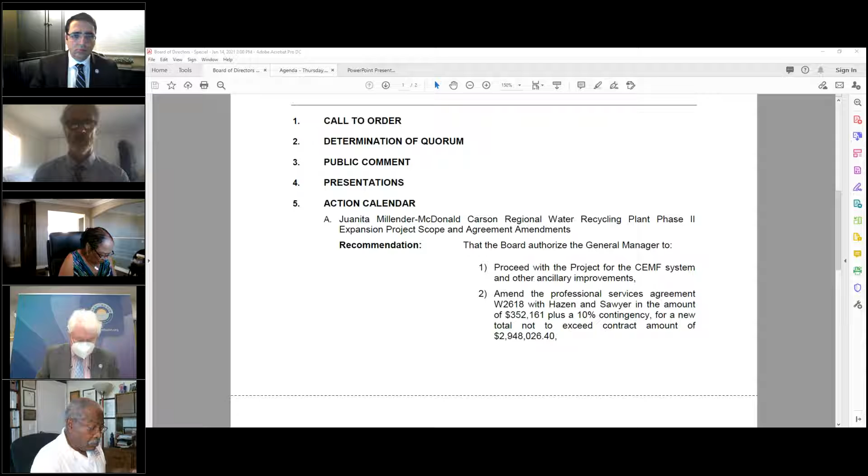All right, thank you. Okay, good afternoon, President Gray, members of the board, council, staff, members of the public. We, first of all, thank you for participating in the special board meeting, which was called together to deal with one item on the entire agenda on the action calendar, and it pertains to a long time project that we've been pursuing to increase water supply and upgrade generally the recycled water supply to the Marathon refinery down in Carson, fed from our regional plant down there, the Juanita Millender McDonald Carson Regional Water Quality Recycling Plant. No water quality, but that's what this is about.

So in a nutshell, there's an accompanying PowerPoint, which would be good if you can bring it up. It was emailed to you, or it will be on the screen in front of you. Essentially, this project has two main components, a TMVR and a CEMF, which will be explained shortly. But the bottom line is that one component was largely financed through Marathon, and one is through West Basin with the assistance of grant and low interest loans. The refinery at this point cannot proceed with their portion, but we can proceed with ours. But in order for West Basin to avail itself of the excellent grant and financing for this particular project, we need to have some redesign, put out a new bid packet, get the bids back, and meet a State Water Resources Control Board deadline - they're providing part of the funding - of June 1st, 2021.

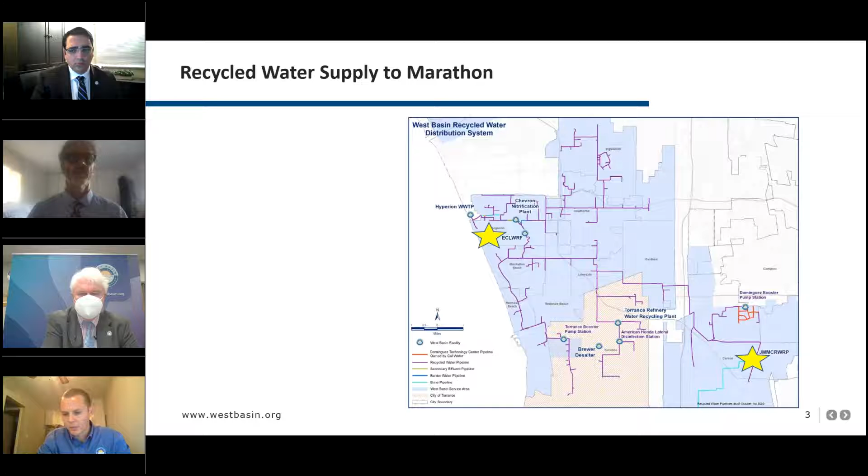Here you can see a map of our recycled water distribution system. On the left-hand side, you'll see where the Edward C. Little facility is located. You can also see the network of our distribution system. As Patrick mentioned earlier, there's over 100 miles that make up our distribution system now, which can easily be seen through the thin purple lines in the map. The Juanita Millender facility is located in the bottom right-hand corner, identified by the second star there. Our supply to the Carson refinery began with an original agreement with the Arco Products Company in 1997.

Construction of the facility started shortly after, and our first recycled water delivery to the refinery occurred in February of 2000. To date, we've supplied them over 28 billion gallons of water, which is a huge achievement.

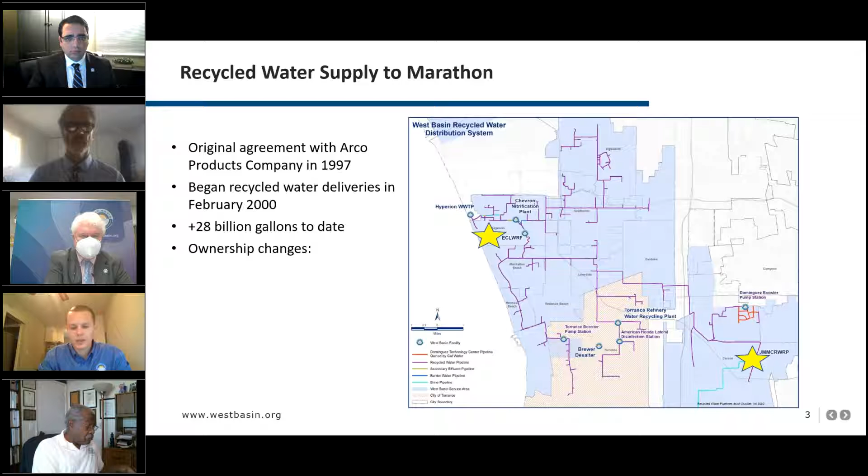Just to make sure everyone's familiar with the ownership changes, I'd like to give a brief overview. There's been quite a few name changes over the years. Arco was the owner in 1997. In 1999, they were bought by BP, another refinery company. Then in 2013, the refinery was acquired from BP by Tesoro. Tesoro underwent a name change in 2017, operating under the name Andeavor. And then finally in 2018, the current owner, Marathon Petroleum Company, took over.

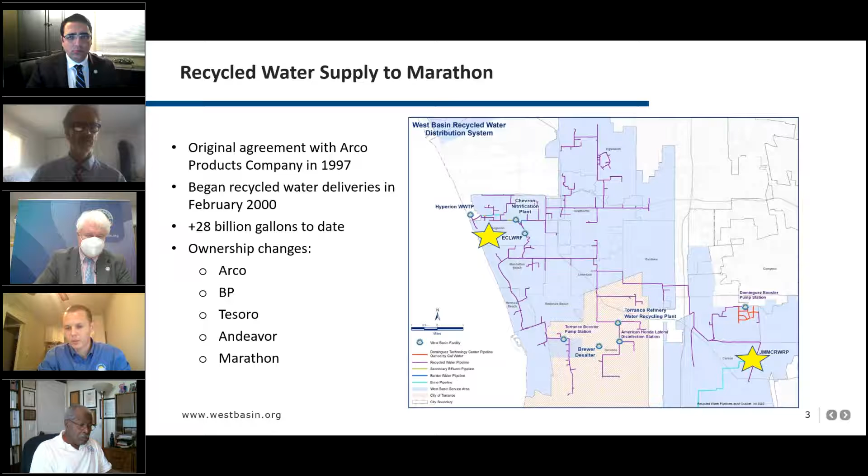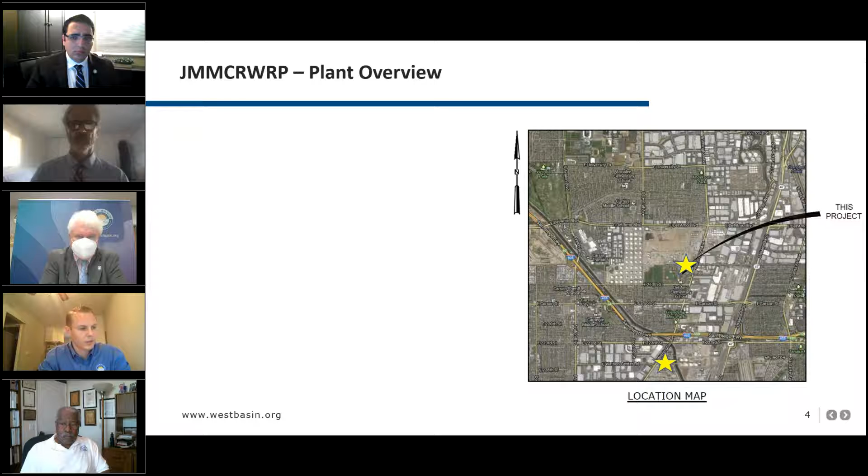High-level overview of the plant. Here's another map. The plant itself is located in the city of Carson, between Del Amo Boulevard and Carson Street along Wilmington Avenue. You can see the first star is where the project itself will take place at the plant. The second star is the location of our refinery, about a mile away south of the facility.

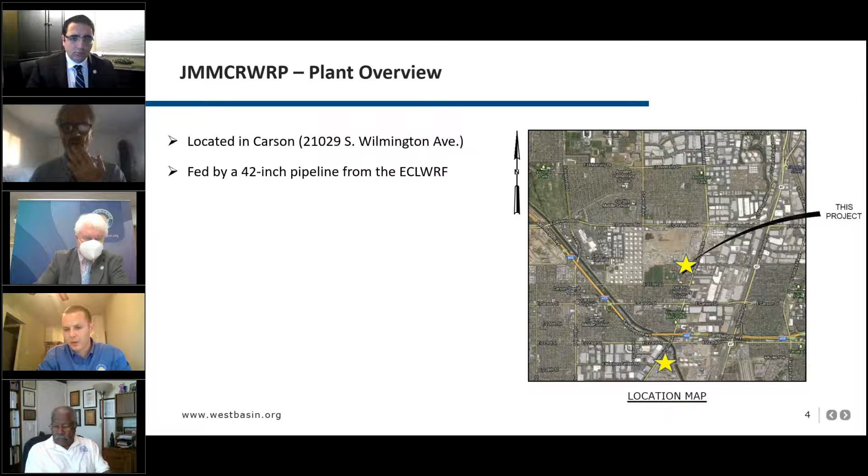The facility itself is fed by a 42-inch pipeline from the Edward C. Little facility, about 14 miles away from the Carson plant. The influent water is our Title 22 water quality, tertiary filtered and disinfected recycled water. The original construction back in 2000 included 2 treatment trains to provide 2 different qualities of water.

The first being a low pressure boiler feed water. That water is produced using microfiltration and reverse osmosis. The original treatment train built in 2000 was for a total of 5.18 million gallons per day.

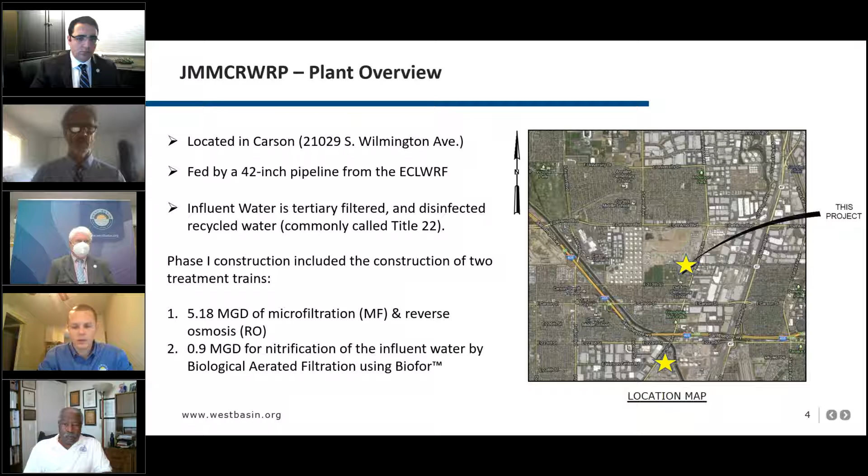The second water quality that comes out of the facility is a nitrified water quality for industrial cooling tower applications. This nitrification process is done by a biological aerated filtration, commonly called our Biofor units. This treatment train was originally built with the capacity of 0.9 mgd.

This will easily facilitate the construction of a new system while the old system remains online, and following construction we would then have the ability to go ahead and decommission the old facility.

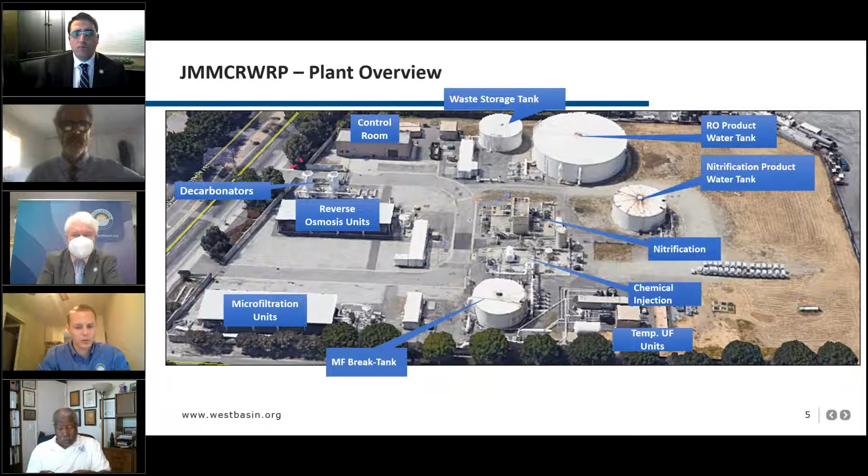Before I dive into the details of the subject project, I want to note that West Basin's had pretty extensive efforts exploring improvements of the Carson facility, going back all the way to 2008. For over a decade, we've been studying improvements not only to treatment technologies, but alternative treatment train orientations and configurations, as well as alternative means for optimizing both the MF and RO capacities. Ultimately, all of these efforts have led to the preferred design and construction of the subject Phase 2 expansion project.

We kicked off the Phase 2 expansion project with the design phase in November 2015. The main scope of work, as Patrick highlighted earlier, included the installation of a 2.0 million gallon per day tertiary membrane bioreactor, which would supplement that nitrified water quality and build upon the Biofor's current capacity. The financing for this side of the project was to be done through Marathon and supplemented by additional grants and loans.

Then the second main component was the installation of a brand new open platform, custom engineered microfiltration system with a firm capacity of 5.88 MGD, which would ultimately replace our aging microfiltration system out there now. This side of the project was to be paid for by West Basin and also supplemented by grants and low interest loans.

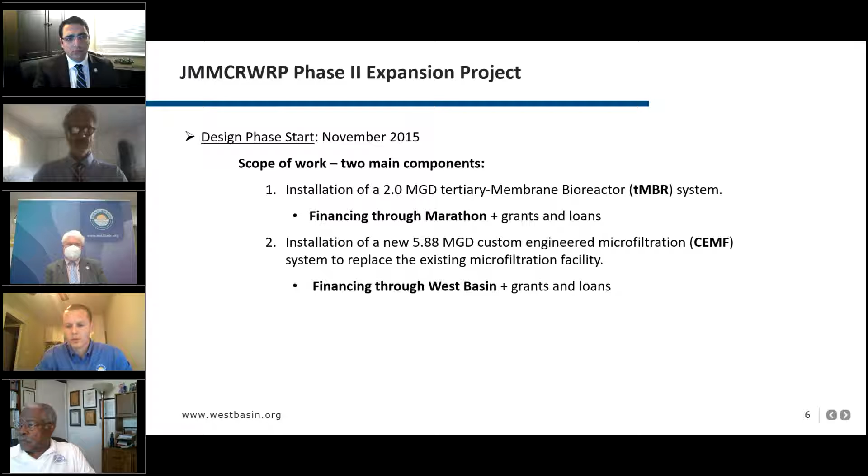Furthermore, we'll be building a new carbon dioxide storage and dosing system, which will help improve some scaling that occurs over time on our Biofor units. Additionally, there will be a small standby emergency generator to keep our RO product water pumps going in the event of a power outage.

It's been noted that recently we've been okay, but in the years leading up to this past year, power outages were quite frequent out at the facility.

Our engineering firm for this engagement is Hazen and Sawyer. They're a professional engineering firm located out of downtown LA. Their home office is out of downtown LA.

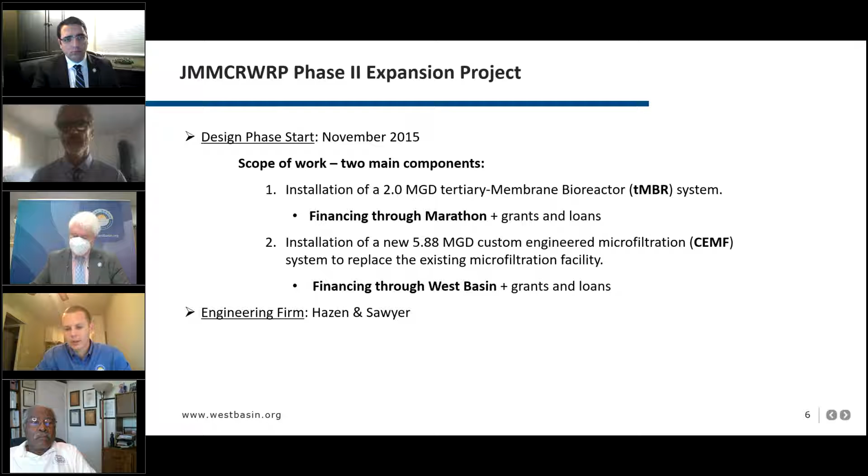One nuance to this project: in parallel to the design, the custom engineered system and the TMBR are highly technical, standalone systems. In parallel to the design, staff also engaged in two requests for proposals for procurement of these specialized equipments. Ultimately, WesTech was selected as the preferred vendor for the custom engineered microfiltration system, and a company called Zenon, a subsidiary of GE Water, was selected for the TMBR.

Ultimately, this approach to the project provides West Basin a handful of benefits. Upon awarding an eventual construction contractor, this allows West Basin to assign these procurement agreements to the contractor. This allows us to upfront establish contract pricing that will inform project financing and funding, and also allows us to pre-select the membrane vendor capable of providing the best overall system to West Basin.

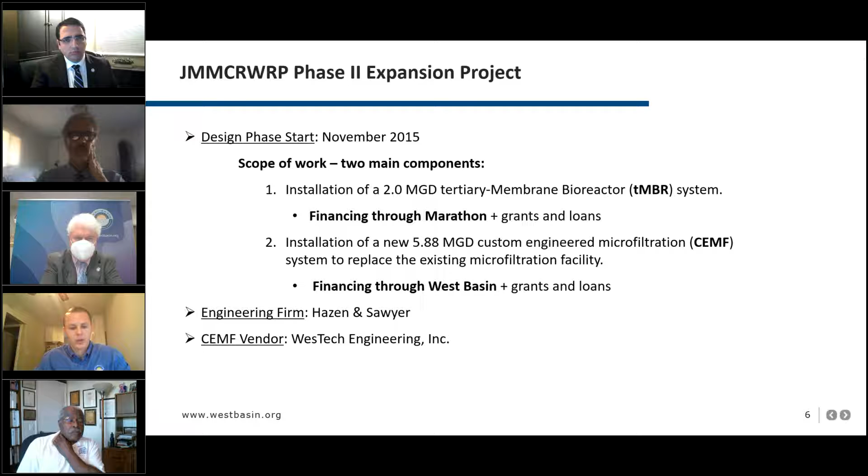This was a competitive and rigorous process that we went through. Thirdly, it provides a mechanism for the pre-selected membrane vendor to be assigned to the general contractor and become part of the general contractor's contract.

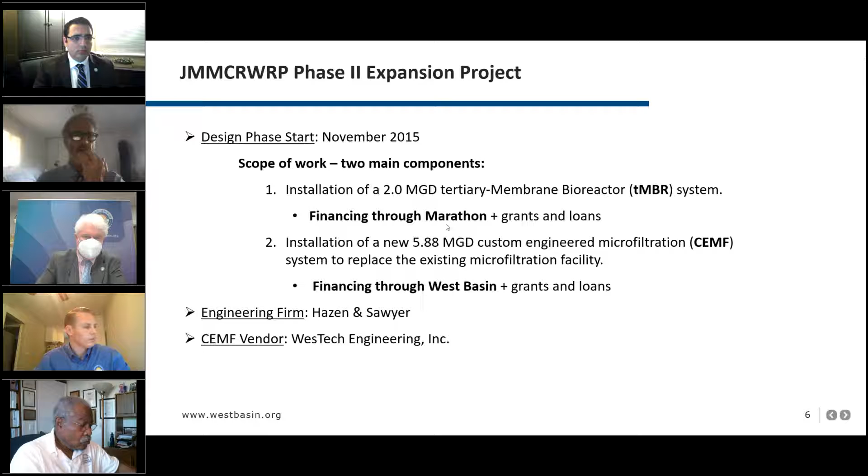Quick review of the timeline of events that have led us to this point today, which will inform our ultimate recommendation at the end of the presentation. Starting in advance of the design phase, before we even jumped into the legwork, West Basin staff submitted a request to the State Water Resource Control Board, Department of Financial Assistance, for funding for this project. We did that about 9 months before the design phase.

We kicked off the design in late 2015, continued through 2016, and ultimately received notice in 2017 from the Department of Financial Assistance that our funding was approved. We wrapped up the design in late 2017 and went out to bid in early 2018, receiving 3 construction bids at the time.

At the same time, staff was engaged in negotiations with Marathon for the funding of this project. Shortly after we received the bids, we were informed that Marathon had acquired the Carson refinery from the Tesoro company, and they let us know they would not be able to commit to the project within West Basin's 45-day required window per the public contracting code. At that time, in May of 2018, the board voted to reject all construction bids, as within their right.

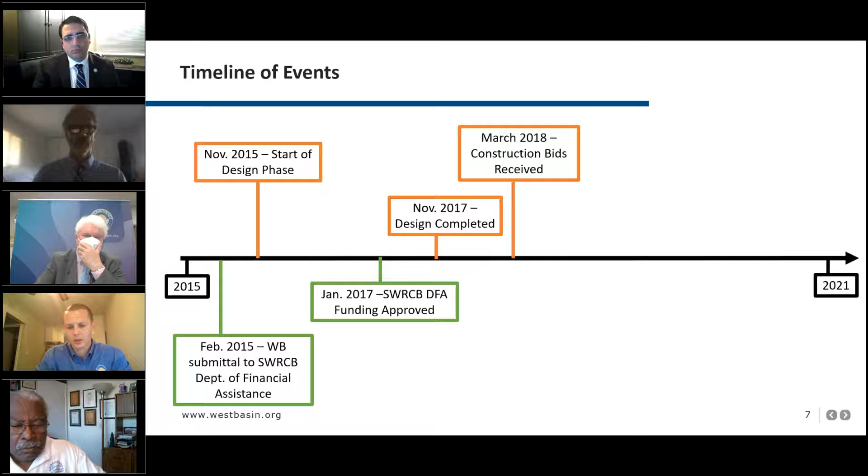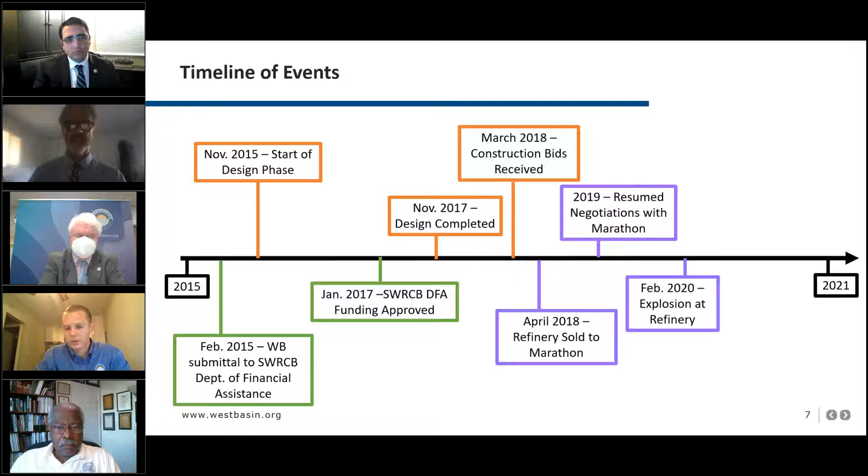In 2019, we resumed negotiations with Marathon, eventually reaching final stages of negotiations. Then early in February 2020, you might have heard this in the news, there was quite a big explosion out at the refinery. Luckily no one was injured, but it caused quite the disruption to their process and stalled the negotiations even further. Just a month later, COVID fell into place here, and the pandemic unfolded before us, further stalling things.

The project's been on hold since. Staff's continued to engage with Marathon, but most recently, at the end of last year, we were notified by the State Water Resource Control Board that they were going to put forth a new deadline in order to receive that financial assistance, requiring us to award a construction contract and have one in hand for their approval by June 1st of 2021.

Immediately after receiving that news, staff again engaged with Marathon and let them know of the new developments. Pretty quickly after, Marathon let staff know that they were going to be unable to participate in the TMBR component at this time due to the economic conditions surrounding the pandemic.

I think this is quite a bit of information, so I'd like to take a second here to pause and ask the board if there are any questions at this time.

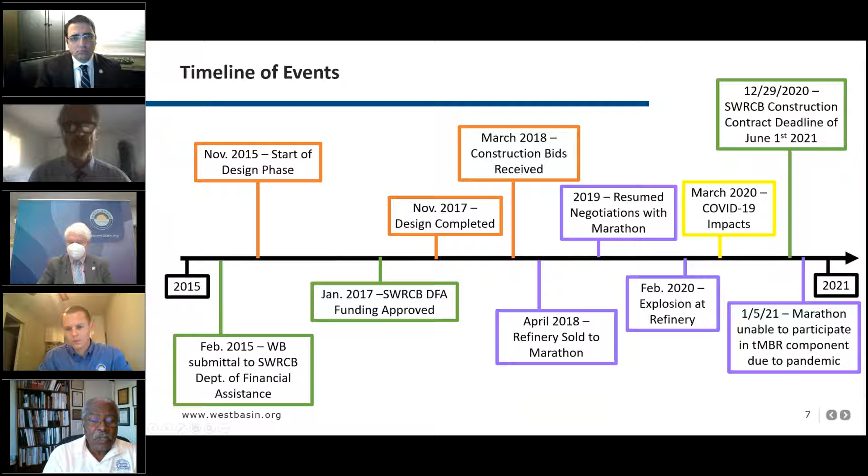All right, Kevin, thank you. Are there any questions, board members? No, thank you, Madam Chair. All right, Director Dear, did you have questions at all right now? Not now, thank you. All right, Kevin, please continue.

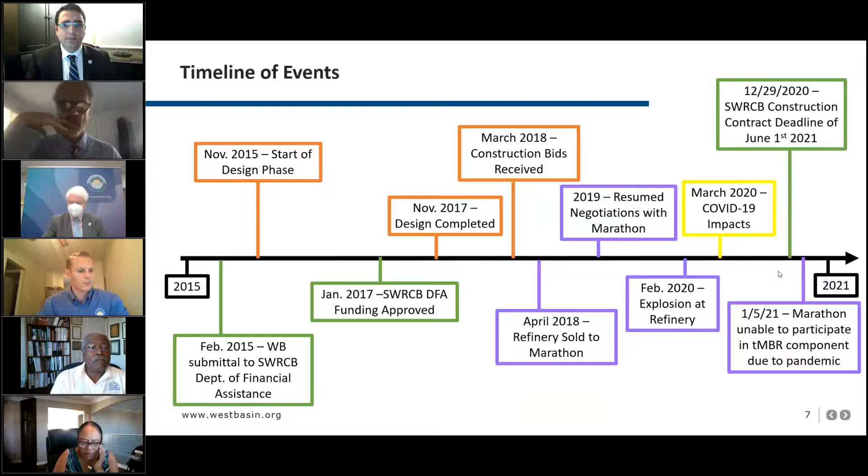Thank you. Now I'd like to talk a little bit about the approved funding and state revolving funds that we did receive for the project, which included both scopes of work. I'll start here.

The Prop 1 grant funding we received was capped at roughly $8.08 million. The nuance is we're able to receive reimbursement for up to 35% of our costs during construction, including the contractor, construction management services, and engineering services during construction. These can be reimbursed in real time, as we receive invoices we can submit those to the State Water Resource Control Board for reimbursement. That 35% reimbursement is capped at roughly just over $8 million.

Secondly, the California State Water Resources Control Board Clean Water State Revolving Fund provided a low interest loan in the amount of just over $15.7 million at 1% per annum over 25 years. This loan would need to be repaid following completion of the project over a 25-year period.

One aspect of the grant funding still up for discussion is that prior to news of the TMBR component not moving forward, Cal Water had committed to providing a grant fund in the amount of $4 million to the project as well.

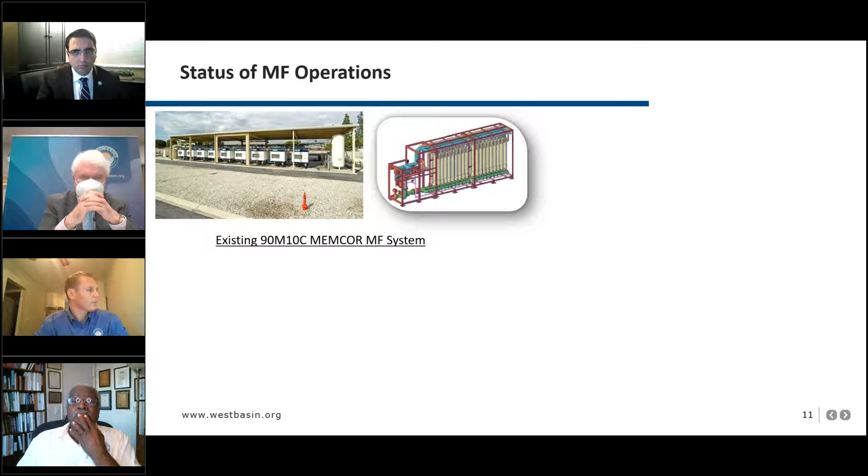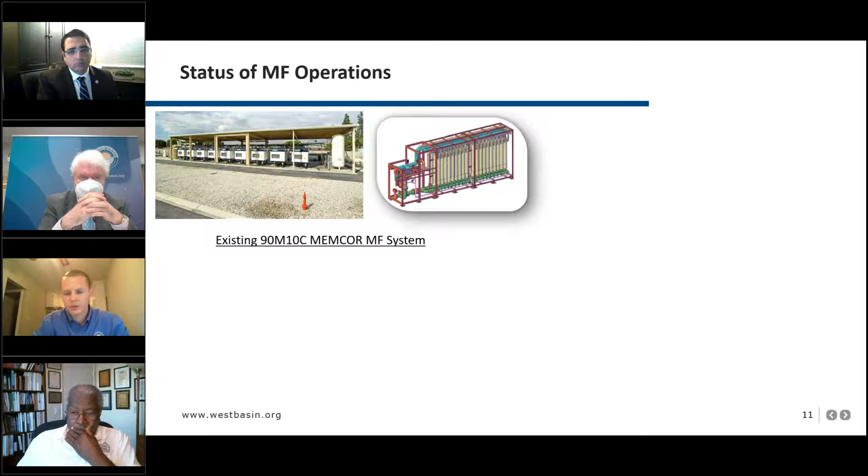Before we get into the recommendations, I just want to give an overview of where we stand with the current MF system. What we have out there, the first image on the left is the MEMCOR system that's currently in place. You can see it's made up of 9 standalone units.

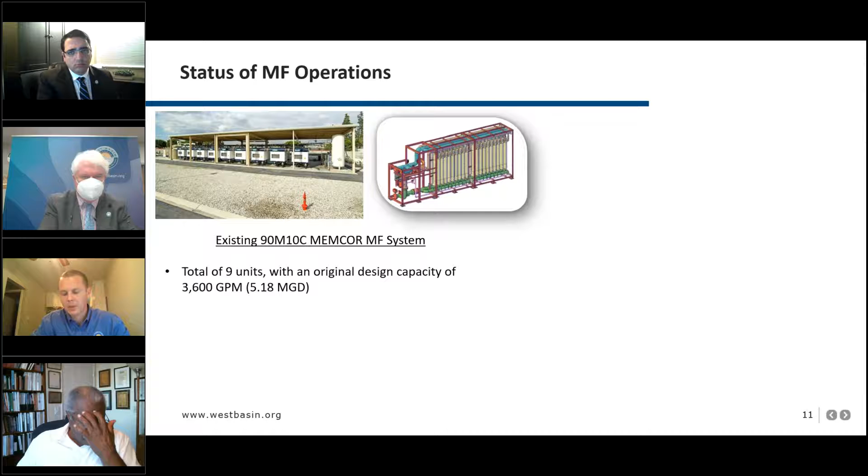It had an original design capacity, mentioned earlier, of about 5.18 MGD. Each unit can do about 400 GPM, but as the system wears and membranes age, we've seen that drop as low as 200 GPM each.

Probably the biggest downside of this MF system is the technology it uses. At the time it was installed, polypropylene membrane technology was the latest and greatest, the best you could buy. But since then, as technology's developed in many other arenas, it has as well in membrane technology.

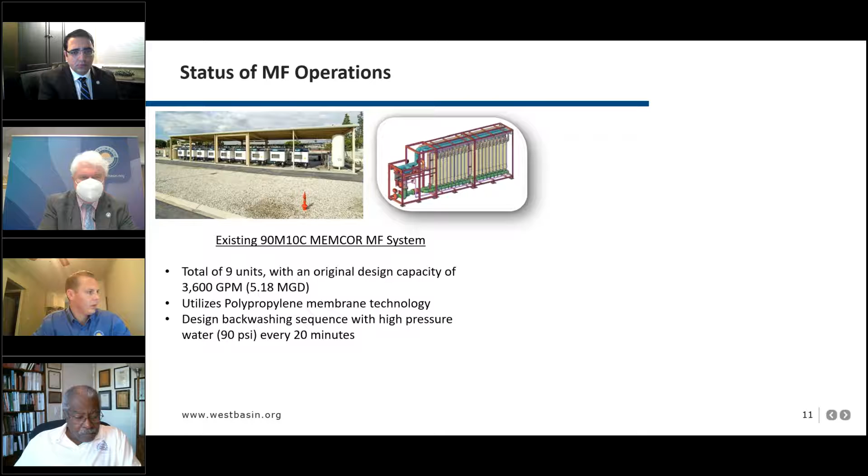One kind of flaw of the current system is that it has a high pressure backwashing sequence. It's at 90 psi, and most of these membrane modules and their housing components are made of plastic. So with a big thrust every 20 minutes over the duration of 25 years, it can cause pretty considerable damage. We've had to do a considerable amount of membrane replacements and thrust block replacements, which do require some downtime, but it is manageable.

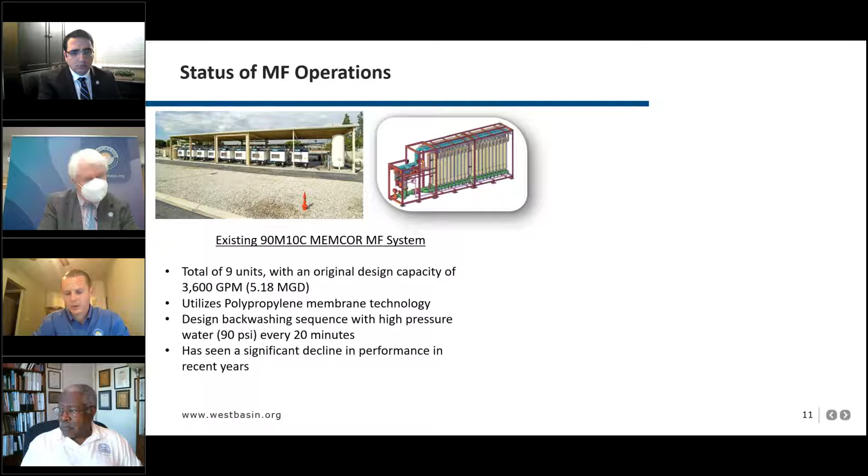As you would expect with an aging system, there has been a bit of decline in performance. Just a quick review of our capacities: we started in 2000 with a capacity of 5.18 MGD. Today, thanks to Suez's efforts and our operations optimization, we've been able to maintain MF production of just under 4 MGD with the help of a portable system as well.

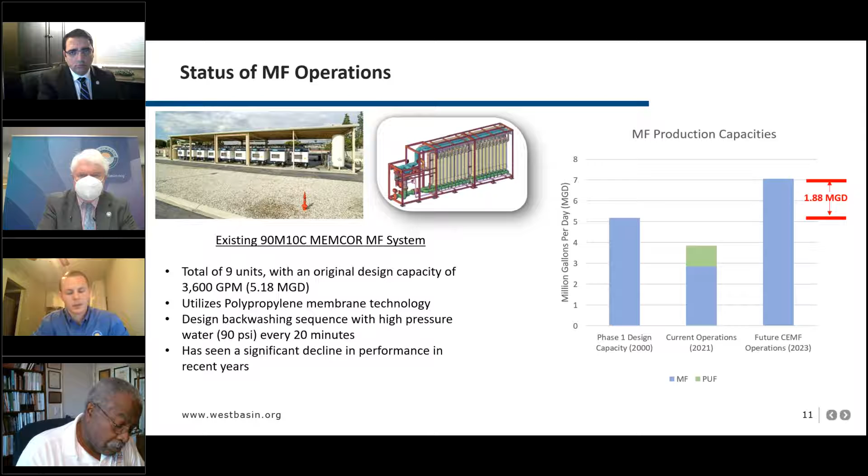Looking forward with the future potential system, we would expect to see an increased total capacity of about 1.88 MGD.

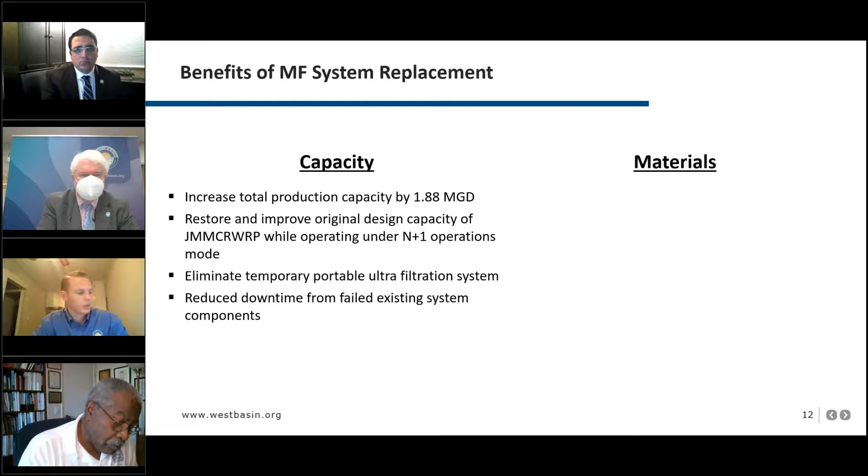So just a quick review on the capacity side, we would see an increase in our total capacity. Not only would we restore the original design capacity, but we would be able to do so operating in what we call an N+1 operations mode, which leaves us with a standalone redundant unit. One unit can remain offline at all times for maintenance purposes, and we would still be able to meet our capacity needs. It would also eliminate the need for our portable system that's currently out there, and would eliminate some of the downtime from failing system components.

The membrane technology would get upgraded. The newest technology is polyvinylidene fluoride, better known as PVDF. This is one of the better membrane technologies out there. It uses sodium hypochlorite to clean. Contrary, the polypropylene uses a proprietary cleaning agent. With sodium hypochlorite, we'll get much better long-term performance out of our membranes.

Furthermore, having an open platform, custom engineered system allows the system to be fitted with up to 6 different membranes. The industry standard when building a microfiltration system at any water recycling facility is that the entire system is built around one selected membrane, and for the duration of that system's lifetime, you're stuck with that one membrane. So building an open platform system would allow West Basin to competitively bid these membranes when replacement is required.

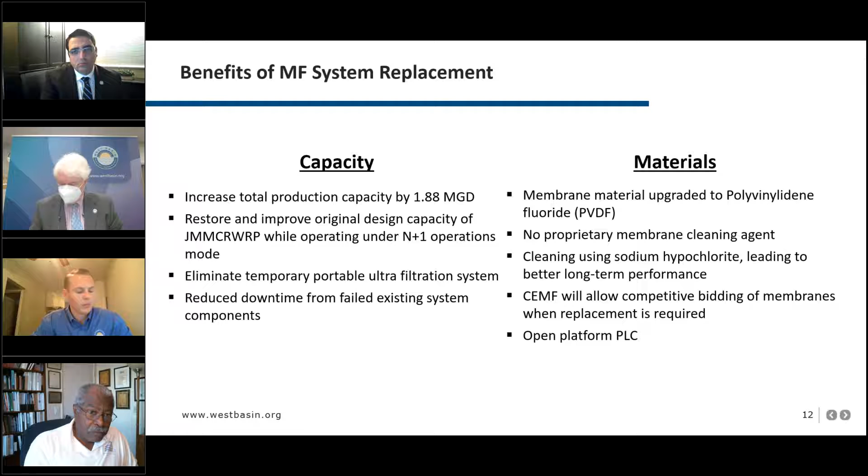Before I read the recommendations for today, I'll give a quick overview again of those conditions that need to be met in order to meet the State Water Resources Control Board deadline. The first is that Hazen's directed to expeditiously revise the bid packages to eliminate the TMBR portions of the work. Secondly, that the request for bid is advertised in March 2021. And then finally, that the procurement agreement with WesTech is amended to change the time frame for which the notice to fabricate can be issued.

So with that, I'll read the recommendations. The first is that the board authorize the general manager to proceed with the project for the CEMF system and other ancillary improvements.

Second is that the board authorize the general manager to amend the professional services agreement W2618 with Hazen and Sawyer in the amount of $352,161 plus a 10% contingency for a total not to exceed contract amount of $2,948,026.40. And thirdly, that the board authorize the general manager to amend the vendor procurement agreement W2754 with WesTech Engineering.